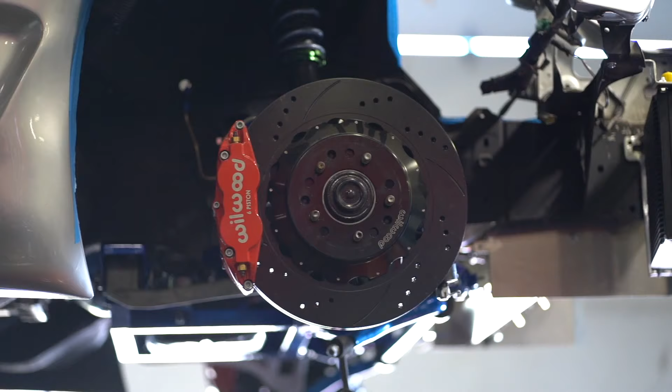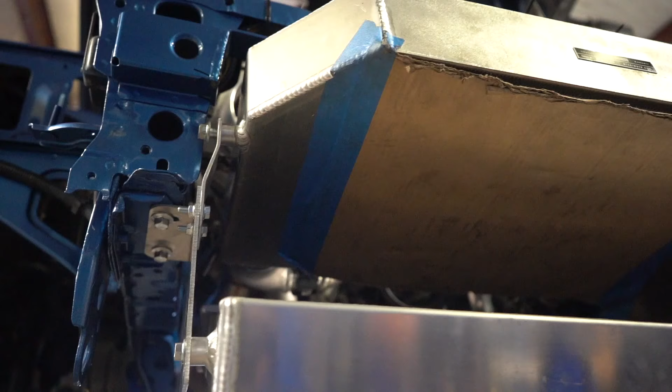Mike, what's today? Today is Monday. It's Dyno Day, Mike! Jeez, just another day in paradise. Oh my God.

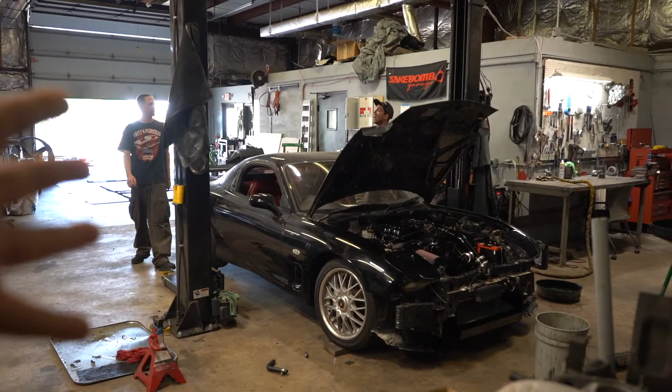So what's the plan with this, Mike? This one's actually a JDM car, belongs to one of two brothers - the other brother's car is here too. It had a stock motor that tested out healthy at 120, so we didn't do anything with the motor itself. He wanted more power, so we gave him a full bolt-on setup. We just cleaned the motor up, sealed everything back up, put it back in, and we'll send it to the moon on some E.

And this is the one you're saying has the V-mount, right? Yep, we designed most of the bracketry so that we could utilize it for both a 20B and a 13B. It really came out absolutely beautiful the way he designed it.

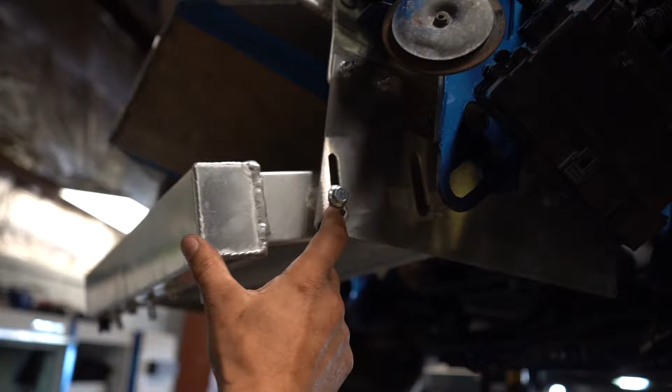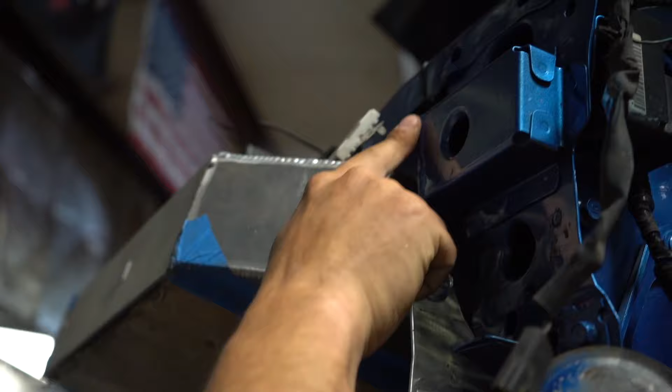The 20B version is over here, a little more broken down so you can see it, but it's got multiple alignment holes - the 20B uses the front and the 13B uses the back, with extra bolts. This right here, you use these brackets for the intercooler underneath. You just have to add this one portion to the frame in front to make room for it. The 13B mount is still in here too, up top for the intercooler. Everything pretty much works off of that.

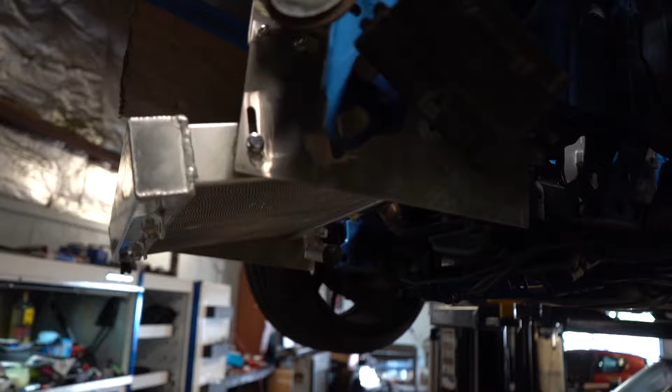So what you're saying is anyone could use this for a 13B or a 20B? Yeah, it just depends on how you want to set it up. So it's very versatile, which is nice, so we don't have to make a bunch of different stuff.

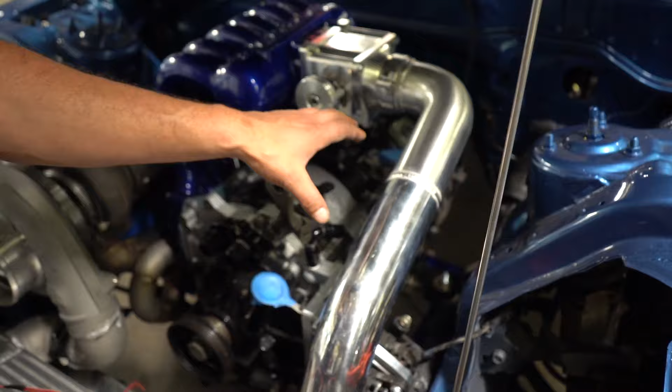Now there's a couple different ways we can do this one. This one doesn't have AC or anything else, so we have no power steering running a manual rack. We had a lot of room here to literally come straight out of the back of the core, right up and in, which makes it look really nice. However, if we were going to have AC and power steering, the pipe would come out the top and go that way to make room, because the power steering sits a little bit higher here, so you've got to get around it with the pipe.

Now we always backdoor the turbocharger - I try to always backdoor it. One, it makes it look neater, cleaner, better orientation, but also makes for a very short coupler setup. So now we can do this in a 90 silicone or with the V-band. It's just going to be a beautiful setup. I'm really happy with how these turned out.

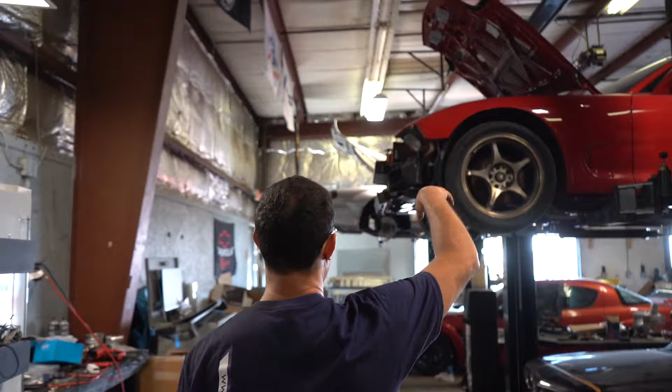And then now you can actually have a 20B that has cooler temperatures overall when cruising around, and we can also make this with AC. We do make the mounts for the RX7 AC compressors on them. This one here, up on the left, actually has an RX7 condenser on it - it has full AC.

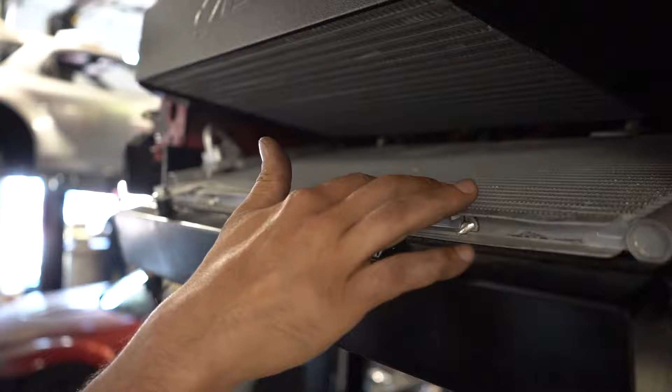Oh, so it's got the AC condenser. This is one of our first ones - we've obviously polished it since, as far as getting the mounts and everything. You can see the AC lines here; we did the AC line across here, down, and welded those. This one also has the electric water pump on it - it goes directly to the radiator on the bottom, then the coolant hoses go up, and this one's the heater hose here.

You're out of the car, the alignment looks a lot better. Oh, we're just finishing the downpipe on this one? Yeah, the downpipe, then we can work on the rest of the exhaust. Oh, okay. Nice. We finally got the material for the 4-inch, which was back ordered for 6 weeks. So we finally got that, and I think we're still waiting on the 3-inch to come in, but we have everything to finish that. Oh, all right. That'll be nice. So he's going to go ahead.

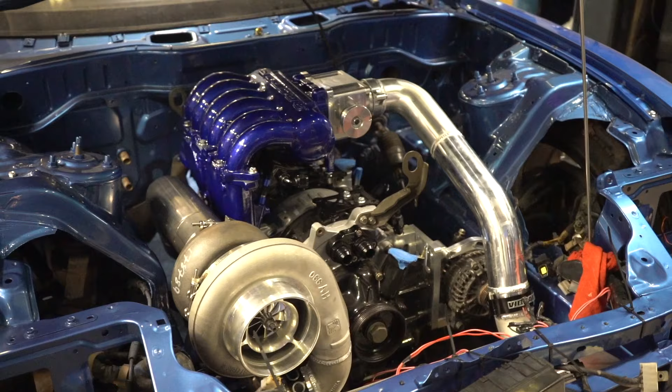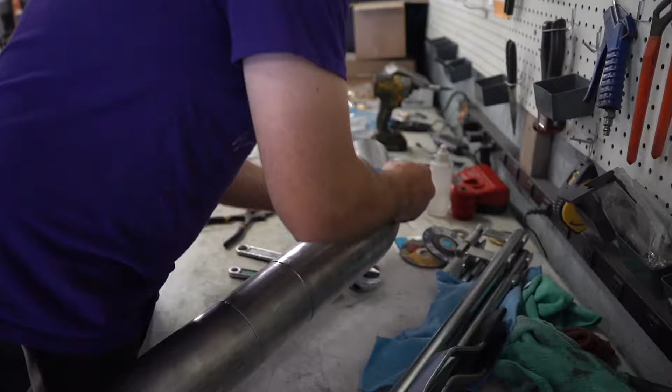So what has to be done to this downpipe? Right now, cutting it down to length so I can put the flex pipe on there, then throw on the V-bands, get everything lined up so I can finish the rest of the exhaust. Cool.

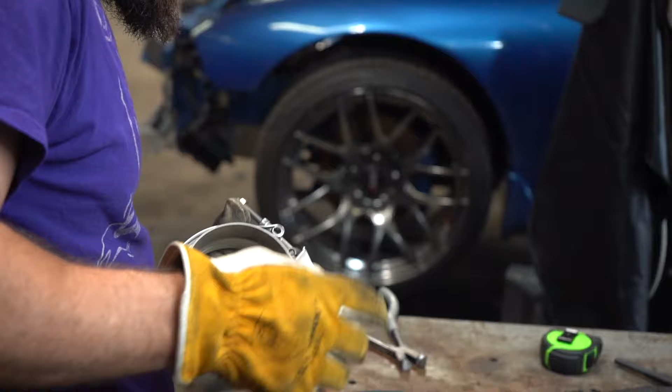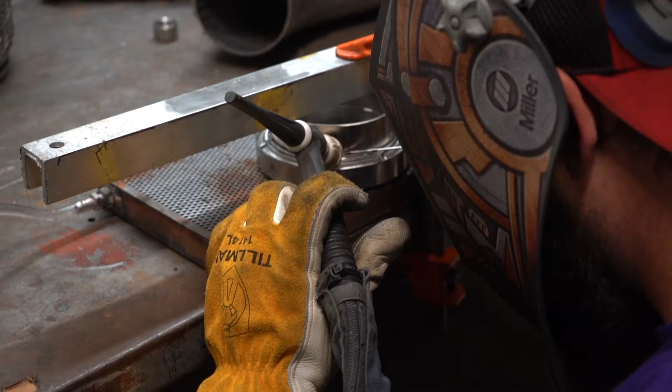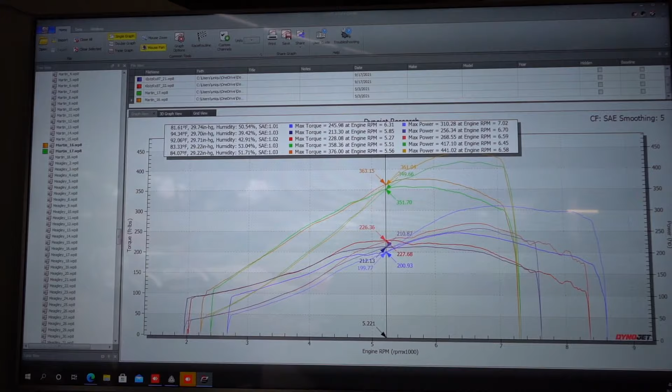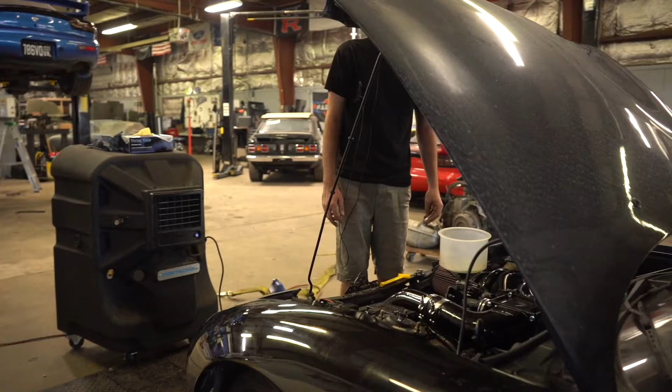Dyno! Yeah! You gotta make sure you get my good side. What's going on? I don't know. Okay. It was the tuner's fault. It was the tuner's fault.

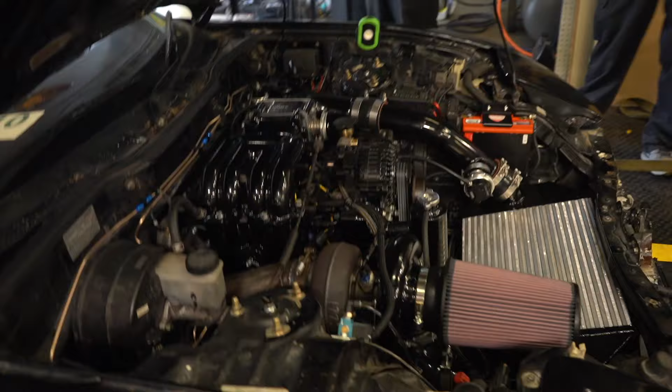First one, Ramos. Gotta stick around for it? Yeah. Oh, this is the first car you've done. Oh. Pretty confident? Yeah. I think it seems good.

Just covering the throttle body cable. Yeah, it's gonna end up getting roasted on the dyno after probably a few pulls. So we'll put that heat sleeve on there. It does a lot actually, so you should be safe with that.

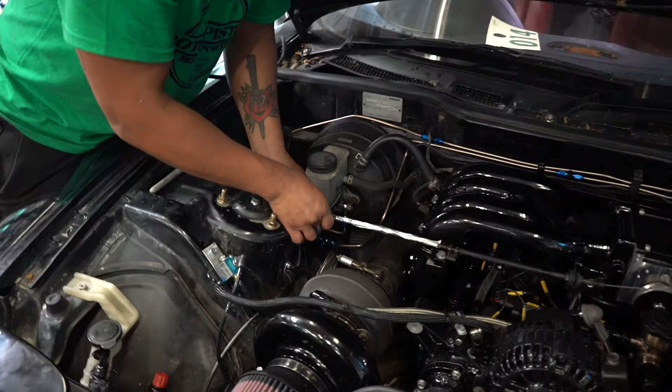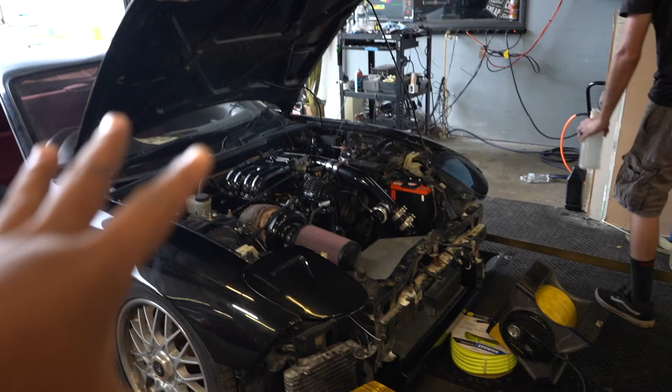Day 2 back. Tuning again. Yesterday we left off, and what you guys saw yesterday was just cruising and making sure the air fuel ratios are good. And so today we are making power on the dyno. So let's see what this makes.

Like we talked about yesterday, this is on a rebuilt motor in the sense of it's not built, but seals, gaps. It's more of a refresh motor. And then it should start on the dyno. It's got a flex fuel kit, so it's on E85. So it's tuned on 93 and E85, and that's what they're doing today. And let's just see what it throws down.

That last dyno run, the car made 308 in torque and 342 in horsepower, and that was on 93. So what they're getting ready to do is switch over to E85, and then we'll see what it does after that. Pre-mixing the jungle juice right now, and then they'll throw it in the car, tune it, and then they'll start adding boost.

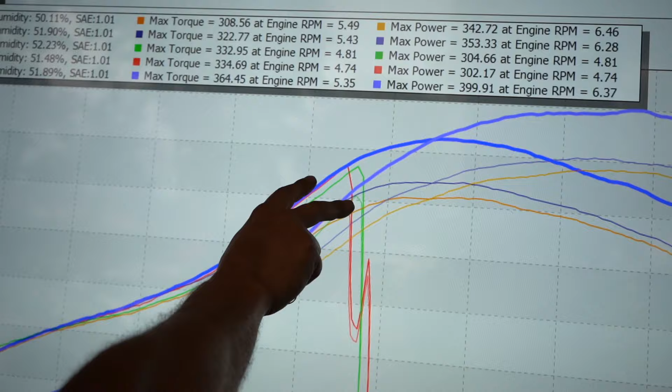What happened? Oh, that's good. So these were the initial pulls on 16 pounds here, that blue one there. And then now, I think that was only 18 pounds. But literally on E85, just to switch between E85 and that, it's probably about 30 horsepower difference between the two.

And that's like literally, yeah, that was only 20 pounds. So I think that was 4 pounds above what we were on pump. And we're just being conservative. It's a stock motor with no history of anything. It's just a JDM motor that tested with good compression. That was only 18 pounds. Oh my God.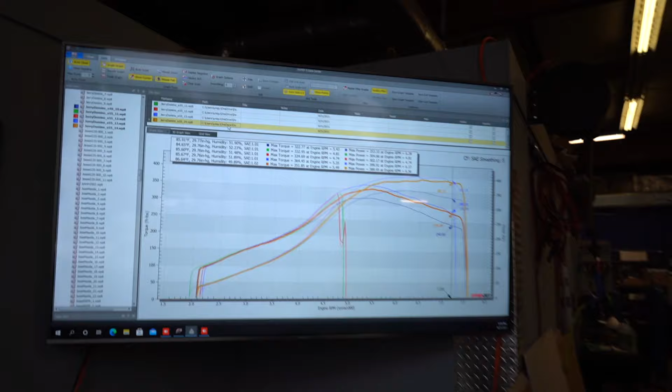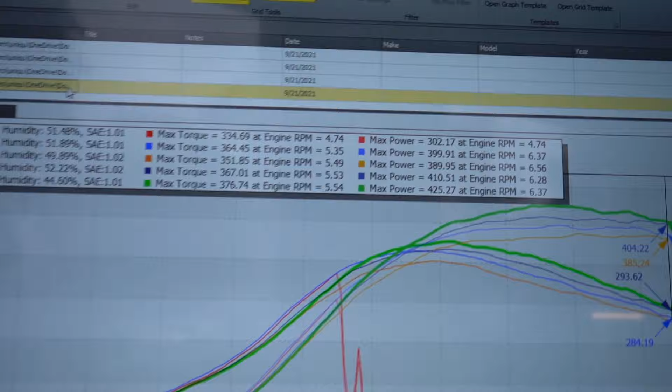We made less on that one. Oh yeah. 389. We're good. 425 on the dyno on E85, and I believe 20 pounds of boost. Mike? Oh yeah. Yeah, that'll do.

So it's a stock motor. We don't want to push it too far, but I think 425 is pretty respectable. It's nothing crazy. It's just an S366 billet with our V-mount setup. Just a good, solid, clean setup. And he's going to rock that for about a year, and then we're going to build a motor for it next year, and send it from there.

Nice. Beautiful. Absolutely beautiful. Ramos, this is yours, right? This is your work. Yeah, one of them, yeah. How you feeling today? Oh, good, man. Very cool, very cool.